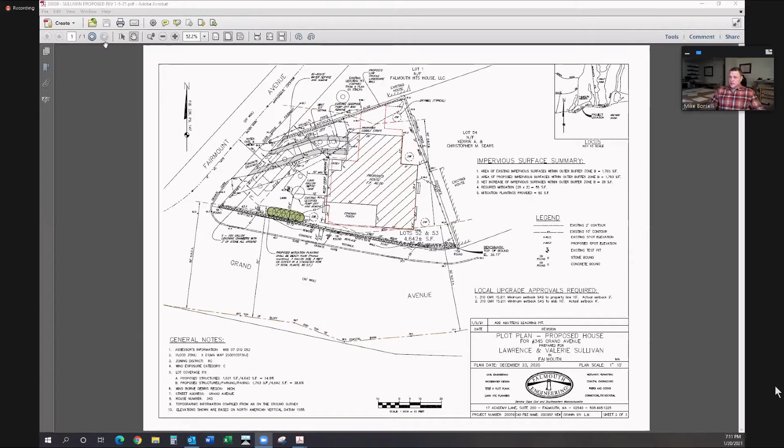The lot itself contains 4,642 square feet. I think you've seen houses bigger than that on some applications. And the existing house is shown on this site plan, outlined in red for reference. There's actually a bump out here that won't be reconstructed.

The house is in a state of disrepair. Significant maintenance is necessary, not up to code. So the owner decided it was best to raze and reconstruct. He's done his best to basically keep it in effectively the same footprint. There aren't really a lot of options on where you could put it.

There's two cesspools on the property, shown as dashed circles, that are substandard and slated for pumping and removal. There's a new septic system proposed on the lot, and it's virtually impossible to meet setback requirements from the road layout or the existing building. So we applied to and already received approval from the Board of Health for setback variances.

We did an impervious surface study, and that's in your package. With the calculations that we performed, there's a requirement for 56 square feet of mitigation planting. We obviously don't have the ability to put it along the top of the coastal bank because the road is there, so we showed it on the lot in this location in green.

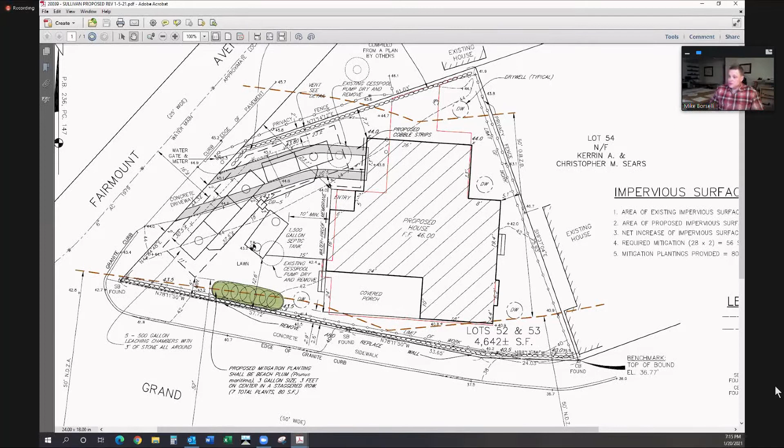Excellent, thank you Mike. Jen? Mr. Chairman, I think the only question we have is when did that deck area go in. Mike, if you want to look into that, when that small deck area in the back went in. In the aerials, it doesn't look like it's there in '18, it shows up in '19, or maybe '19 and '20. You might just have to look at that, or we might just have to talk about it.

Sure, if we do have you ground truth that, for when that decking went out there, it shouldn't be a long continuance. That's an easy thing. And if anything, it might offset your AC, and it might actually eliminate the need for your, what did you say, bayberry or beach plum. Beach plum, yep. So you may want to look into that.

The only other question we had, besides the stuff we talked about yesterday, was the wall, the little wall along that. Is it just kind of like a block wall, kind of tidy it up? It looks like poured concrete. Yes, parts of it meander out off the property into the road layout. I believe at its tallest point it's 2 feet. It's more of a tall curb than a wall, or a landscape feature.

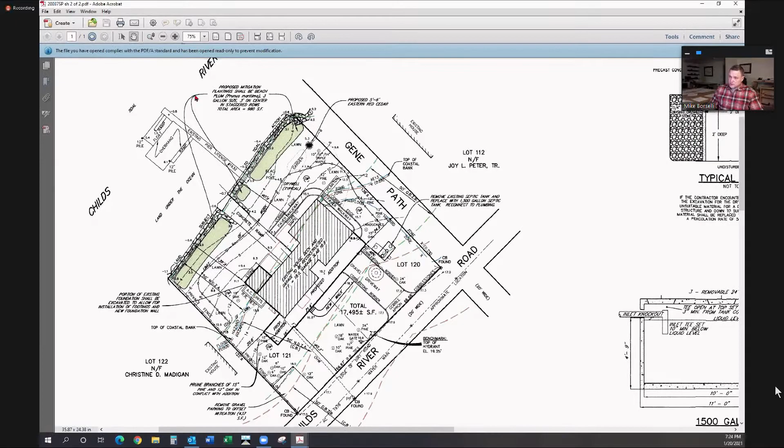The staff comments were reviewed, and there was a specific comment about a tree located right here, this 15-inch diameter tree, which we had described as to be pruned. When this addition is actually laid out by a tape measure and you really look at it closely, and the staff concurs with this, that tree would really, there's not a high likelihood it would survive. In fact, the canopy would be very close to the addition.

So the reality is it would be better to remove it instead of attempting to prune it, and if we removed it, we would replace it with another tree. But in talking to my client, we made a decision collectively, mainly with my advice, that this addition is not absolutely necessary. The applicant has made a decision not to construct this proposed addition. Therefore, the house will be squared off here, and this 16-foot by 12.5 projection will be eliminated. It'll eliminate any need for any pruning or any changes to the tree, because the face of the existing house will remain the face of the house after it's reconstructed.

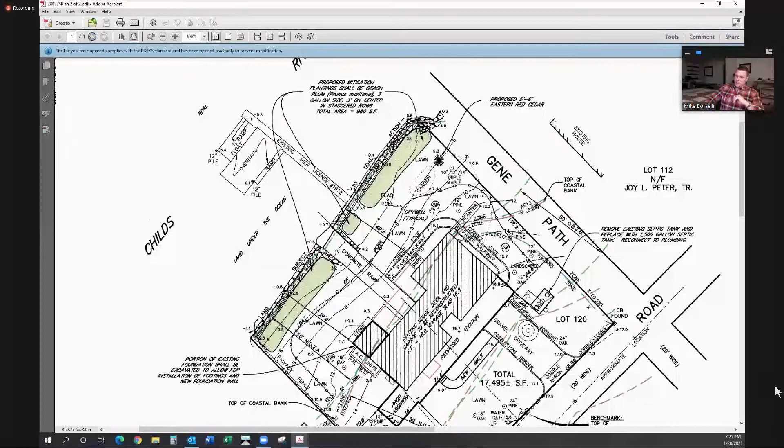There's another reason other than the tree that's important to the applicant, and that is when we staked out the required mitigation for these additions, he didn't realize how much mitigation he would need. His family and extended family and young grandchildren use this area. It's like the only flat area of the yard available on the water side of the house, so he was concerned about the need for putting the mitigation there. So if we eliminate this addition, there's another more self-serving benefit, if that's the right word, there's a reduction in the amount of mitigation.

So I would submit a revised plan that shows a portion of this mitigation eliminated from the application, to offset the reduction in the proposed impervious surfaces. So hopefully that was clear. I don't know if it was a mouthful, but if you have any questions, I'm happy to answer them.

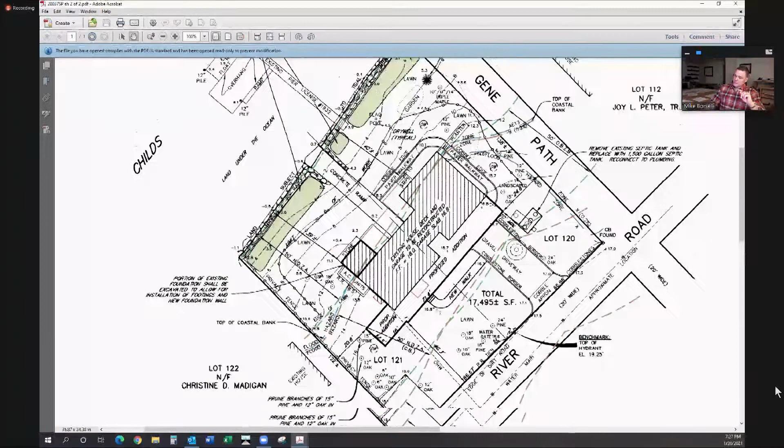The only other activities on the site include elimination of this pavement, this remote parking area. And there's an existing septic tank that's less than 10 feet from this addition, so there's a note on the plan to remove it and install a new 1,500 gallon septic tank that meets the 10-foot setback. The system passed an inspection, so that's the only upgrade to the septic system proposed. There's no plans to increase bedrooms; the number of bedrooms will remain the same. Otherwise, we would be proposing a septic upgrade as well.

I think there was one other question about a fence, and I'm not sure I understand the question. There may be a small wire fence. I think maybe there's a reference to a wire fence here, but I don't know the basis for the question or what's behind the question.

I believe there's about a 3 or 4 foot tall wrought iron fence along the wall. I believe so, but I'll have to check with my client. I believe, because of the grandchildren, it was like a safety thing, and there was no intention to remove it. But I can double check with him because of the safety concerns with this wall.

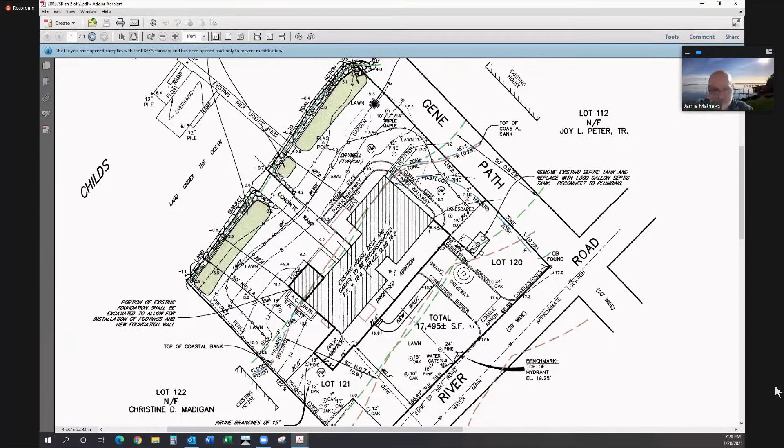Yes, Mr. Chairman, Pat's right, Mike. There's some little wrought iron fence right along the top of that revetment, because it's just lawn right down to the revetment. So it probably is a safety thing. We just wanted to know, once they put the plants there, are they going to be removing that? Because it is kind of an impediment to wildlife.

So you'll be needing a continuance, so you can check with your client, because you're going to be revising the plan. So I'm assuming you're going to want the third on this one too, correct? I would request the third. Okay, unless there's some chance that I can just submit a revised plan and you could close the hearing.

I'd like to see where you're going to put the mitigation, because I don't want to get into a situation, Mike, where all of a sudden the mitigation's like elongated along the property boundaries. Not that you would ever do that, but I just think that, since you're revising a significant portion of that mitigation, the board should be able to see what they're approving.

The only other thing is, after Alyssa and I had you on the phone yesterday, Mike, we were taking another look at the pictures she took, and that 12-inch pine near the planter you have over there. This, oh yeah, I see it. And the 12-inch oak over by the 15-inch pine I originally was concerned about.

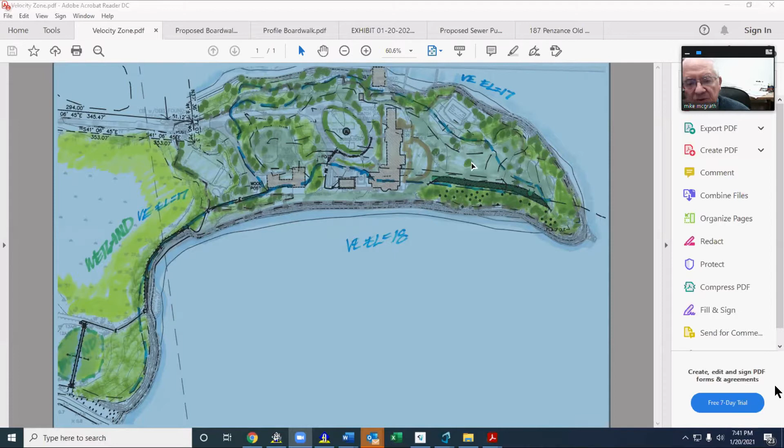There is the next thing we're doing, I should show you. What we're going to do is show that there's going to be a bathroom installed in this end of this structure. This is a stone structure. It's connected to this by a stone wall, and there's a framework overhead. When we put this bathroom in, we're going to put in a proposed connection to the existing sewer.

The sewer was installed a long time ago, over 20 years, but the capacity of this septic system is for 11 bedrooms. There's been changes in the interior of this house, and now there's only 5 actual bedrooms.

But in any case, this is for people that might be working on site. They can now have access to a bathroom without driving offsite or entering one of the private residences. And with the privacy of the new owner being paramount, plus the risk of COVID, he's decided it would be better to put this bathroom in.

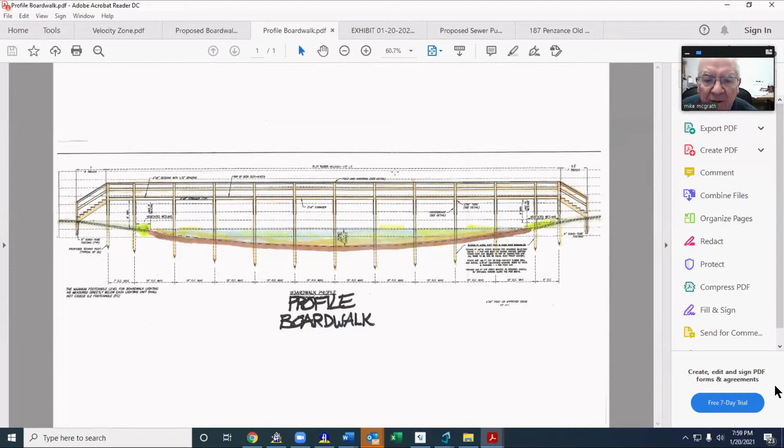I have purposely chosen this to be designed in accordance with the coastal zone management standards. If I were to elevate this above the velocity zone, like could be implied, it would be much, much higher. And I didn't think that was either appropriate for the landform nor appropriate for the neighborhood.

So when I look at this project, yes, it's got some interesting aspects, but I know from what I've seen and what I've read about the reports of this technique, that this technique will restore this pond. It may take 2 years, but I believe that's an appropriate activity, and I think it's a worthwhile endeavor. And I look at all of the things that are being done on this site, and I think it's absolutely an approvable project.

Anyways, I'd be happy to answer any questions that the commission might have.

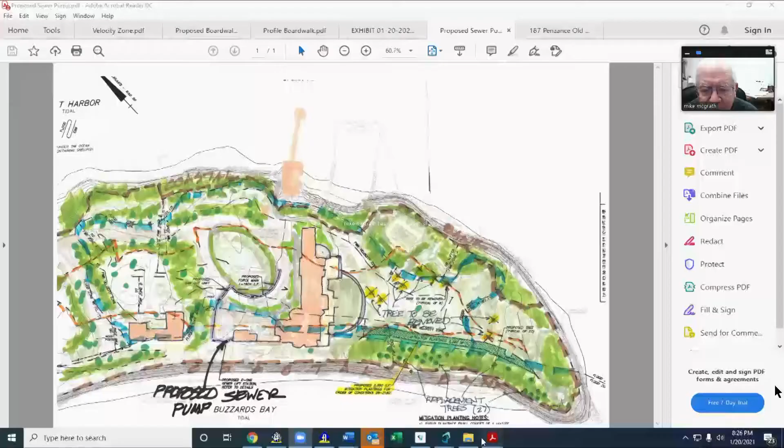Could I share my screen again? Yes, sir. Sorry, I'm a little bit slow. What I think you're talking about is that we staked out this proposed path, but we also did a survey of it a long time ago. So it may well be that what you saw was the remnants of when they did the original survey, but that was over a decade ago, over 10 years ago. So the proposed path here, we were putting it up against the riprap, but there's no question there's been erosion in this area. So have I answered your question?

Almost, you have the right area. I was wondering, the stakes said the pathway in that area that you ran the mouse over, but would it expand toward the wetland areas or expand toward the ocean? What I had thought was going to happen was we were going to build the path basically centered on the stakes, but we can adjust it on the ground if you want us to. Well, if you centered it on the stakes, that would be a build out from the center line, both toward the ocean and the freshwater wetlands. Is that your intent? Yes, it was. Okay, no further questions.

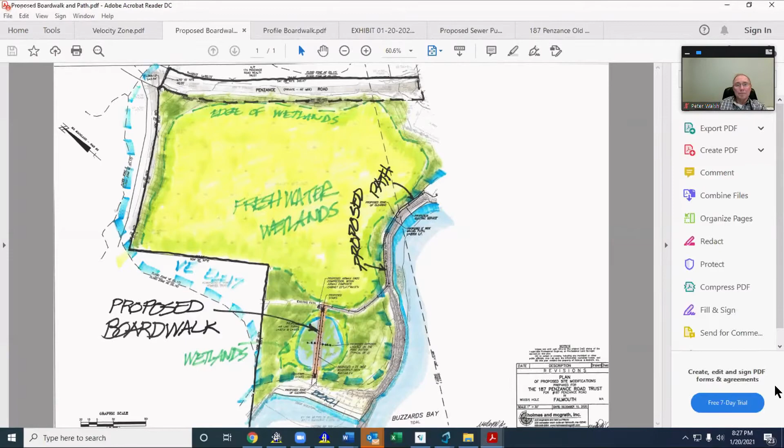All right, Mike, if you would stop sharing, please. Trying to. Oh, okay, thank you. All right, Steve. No questions, sorry.

All right, Courtney. So it appears that the major sticky wicket on this project is this boardwalk. The only comment I have is I would concur with Lori and with Jen that you guys should explore what alternatives you have for some kind of a meandering path that avoids taking out major trees and so on. I know you're pretty ingenious, Mike, when you put your mind to it. So hopefully you can come back to us with a plan that kind of meets those concerns. I mean, if this wasn't a velocity zone issue, I probably wouldn't have as much of a heart attack about it, but it is in a velocity zone, and there's enough precedent that has been cited by people in the audience as well that we would be going against if we were to approve a boardwalk. So I would look into the alternatives.

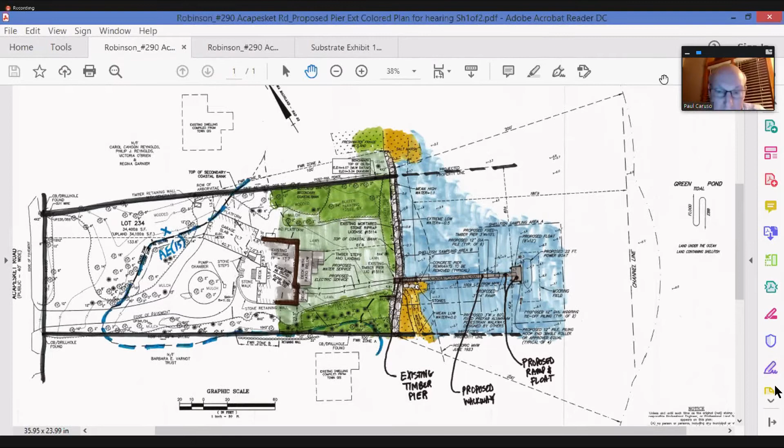Good, hopefully you've all received my report. For the record, Paul Caruso, Cape Coastal Resources. I'm working as a shellfish consultant for the project. I have a prior history with Mass Division of Marine Fisheries for 30 years as a senior biologist.

Hopefully you've all gotten the report and been able to read it. I don't want to go too deep into it unless you need more information because it'll take up too much time. But a survey was performed at the site August 20th and 21st, early in the morning, because the good tides were early in the morning. We had minus tides, which makes things a lot easier working in shallow water. As pointed out in the previous exhibit, the seaward margin here of this property is bordered by a continuous seawall.

We have a small fringing salt marsh, and north of the salt marsh, the subtidal land runs right up to the riprap. There's no beach per se. Sediment-wise, you have a nice sandy mixed sand flat that runs offshore to about -3 feet. At that point, we have a relatively steep drop off. It goes off pretty rapidly to an all-mud bottom.

The survey, as per the regulations, was divided into two areas. Area B is the shoreward area, and Area A is the area outside of that. That shoreward area extends out to 60 feet seaward from the mean high water line.

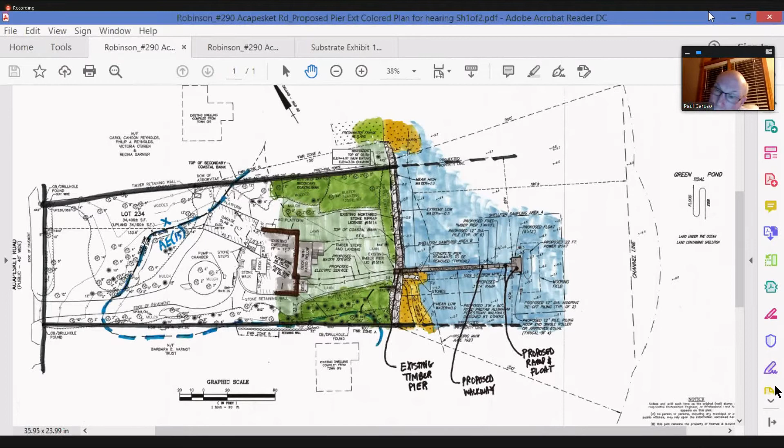Let's pull up the exhibit we were talking about of the sediment type—Jeff did this. It's pretty nice. If you look at the sample points with the dotted circles around them, that's all the muddy habitat. You can see there's a bit of a diagonal to the bottom where it's all mud seaward, and only a few muddy spots shoreward of that line. That line is right at the break between the two areas.

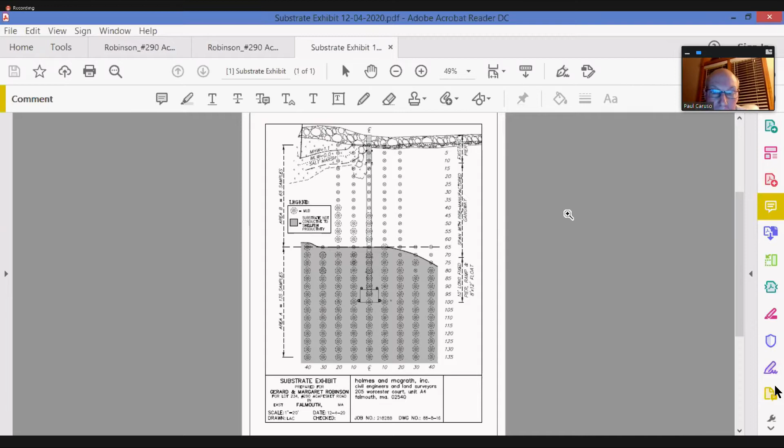So pretty much it. Anybody has any questions, I'll be more than happy to answer them. Thank you, sir. Mr. Wood, did you have something to add?

Yes, Mr. Chairman. Glenn Wood, Rubin and Rudman, good evening. Just a brief couple comments, in particular relative to the case law that we cited and in reviewing the staff report.

I was involved personally in both of the two cases that we cite in our letter to the Conservation Commission: the Olson project, which is on the other side of this pond, but south of the bridge, and then the Adams dock project, which is about 10 plus or minus properties to the north.

Interestingly, what we've found over the years—and I frankly haven't done a dock project in Falmouth in some number of years, the last recession really shut that down to some extent—is that what we found in this survey through Paul's work is very similar to other projects I've been involved in the past, whether that was with Holmes and McGrath or Mike Briselli and LEC, dating myself here.

But from a dock siting perspective, the west side of this pond is very appropriate for docks, because what we find is we do have some viable shellfish habitat due to substrate in the inner areas, as Paul's survey shows.

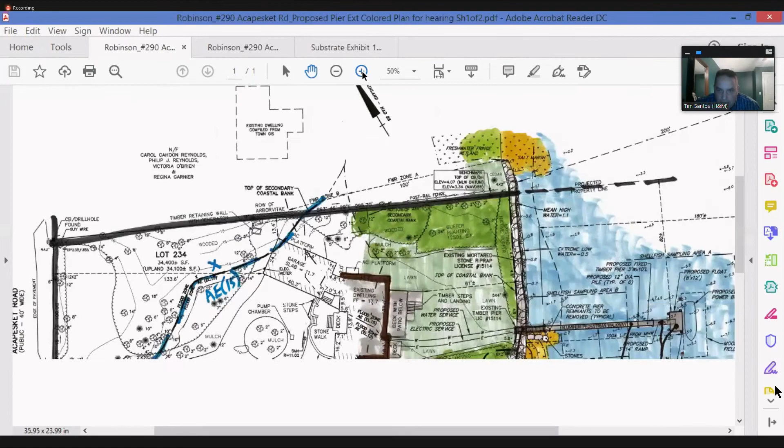All right, Pat? So maybe you can clarify something for me. I've looked at various drawings, and it's unclear to me if you're measuring the length of the dock under our regulations from the mean high water, or from the salt marsh. Can you clarify? Yeah, if you don't mind, I'll pull it back up. Sure, it's from the mean high water. Just give me a second, please. It's measured from the mean high water, which is actually slightly higher up on the riprap than the salt marsh. So if you've been to the site and looked under the existing wooden pier, obviously the salt marsh is lower than where the mean high water comes on the pier. But it's measured from the mean high water mark on the pier out to the terminus end, so the mean high water is actually more restrictive than the landward edge of the salt marsh. Does that make sense?

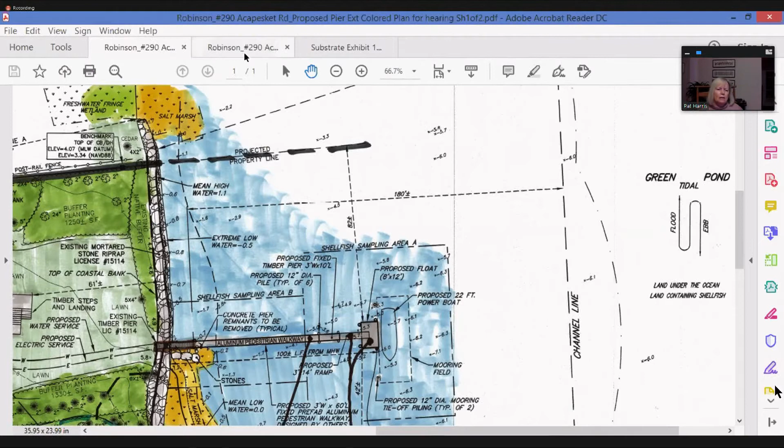Right. Yeah, and when I was out there, I saw some algae on some of the rocks in the revetment and was kind of guessing where the mean high water might be. But what I'm struck by is I look at your cross section and it looks as if the dock measured from the mean high water out to the float exceeds 100 feet. You note on this cross section 107 feet. Well, the 107 is measured from the landward edge of the existing wooden dock. Okay, and how many feet do you take off to get to the mean high water? I believe that would be 7 feet.

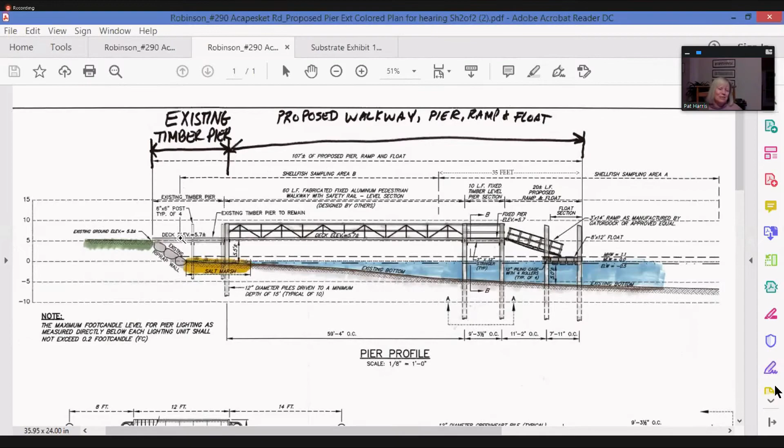Good answer. Okay, I have no other questions. And I apologize, I wasn't trying to say that in a rude way, if it came off that way, because I just realized it might be helpful.

It looks like this. Are you planning to continue this? I think we probably would continue it if staff and the commission members are looking for the mitigation type plan, and I believe Jen's looking for that, so I'm assuming the board members would be looking for that. When you submit the amended plans, could you also address my concern? Yes. Thank you.

Peter, Pat addressed my concern, no further comments. Excellent. Steve? Thank you, I had a question about the length and that was answered. Thank you.

Courtney? Actually, my question is more for Jen. It seems to me over the time I've been on the commission, and it's now a long time, that we have seen projects similar to this in the past where the applicant has attempted to bridge a shellfish area to get far enough out to build his dock or have his dock. Is that, am I dreaming, or have we actually had that? And in those cases, if we did, how did we rule?

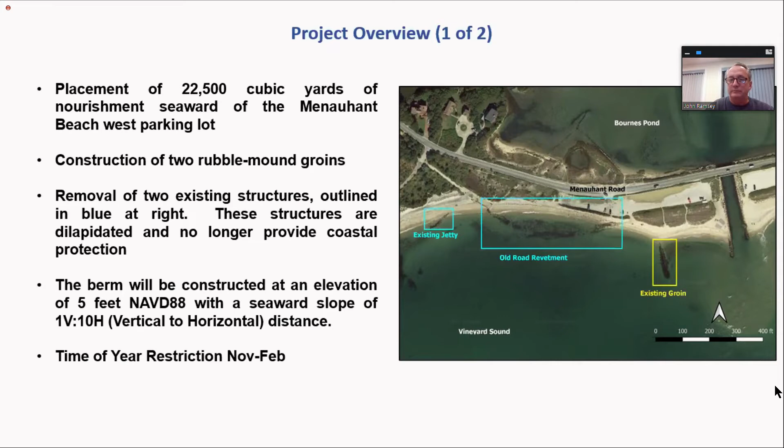One of the things we talked about last time was the removal of the existing building foundations. I'll talk about this in a minute, but one reason they're not shown very specifically on the plans is that this beach is eroding so quickly that more of the foundations keep becoming exposed. We specifically see that in the building foundation that's there—parts of it came up just this past year that weren't exposed last year. So we don't want to say too specifically what we'd like to do, but we want to make sure we're working with the Conservation Commission staff to ensure all of that is removed.

I know the DPW is committed to removing the bridge and all the structure associated with it, the old bridge, and getting as much of the foundation, if not all of it, and certainly everything exposed, out of there. There are a lot of wood piles and other accoutrements associated with that, and there may be some water lines we need to deal with. The Conservation Commission has dealt in the past with the asbestos-lined water line along the old roadway, and we anticipate running into this under the bridge. The town knows it's a hazardous waste issue that will be costly to remove, but they're committed to going forward with that process when we remove the bridge, removing all of that as well.

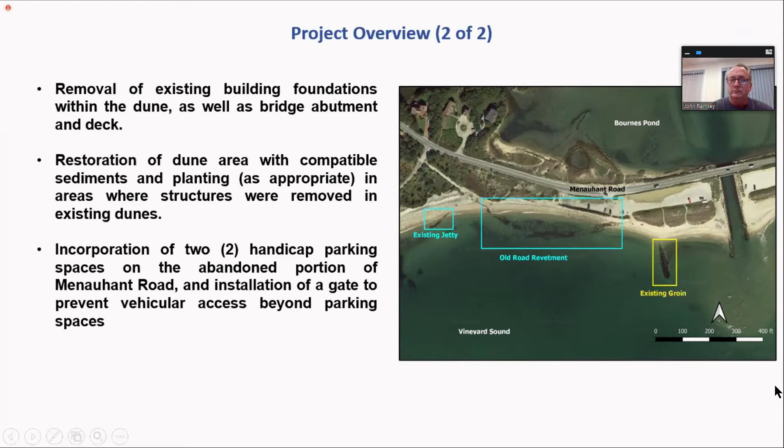This is the overall site plan you've seen before. The only difference here is these spaces. Now when you come down Foster Road, you'd actually come down old Menauhant Road, and the spaces would turn in this way. As Jim mentioned, there's an 8-foot area between them so it's ADA compatible. You also see that the rocks at the end of the road would be removed, and then this gate would be placed, allowing vehicles to back up and go forward back out onto Foster Road and out to the existing Menauhant Road. That should alleviate some of the concerns regarding people having to back out onto Foster Road.

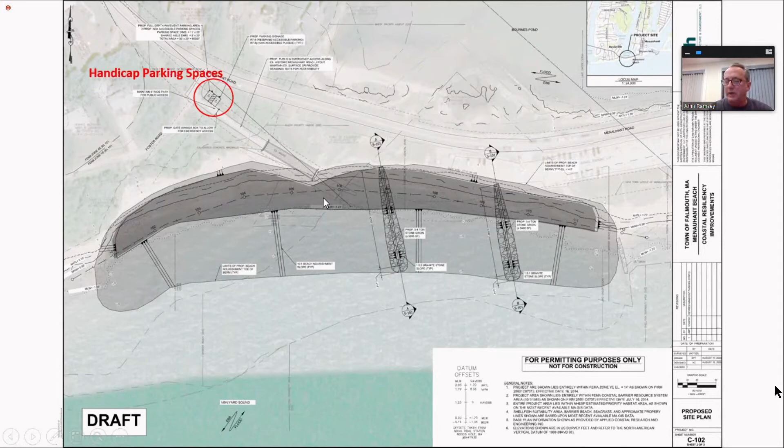Then the other issue that came up in comments from the commission was about making sure we include some beach profiles.

Sorry, we'll talk about potential planting first. I moved these slides around as we were going.

One of the questions that came up was about planting the actual beach berm. This came up regarding potential planting in the beach berm, where there's going to be nourishment to the east of the inlet associated with the bridge project. In a similar case, we reached out - if you have questions about this, it was actually Trey who talked to Amy Hoenig at Natural Heritage.

Basically, because this is plover habitat, they don't want to see planting on the beach berm itself. They wanted to leave that barren for the plovers. On the other hand, they know we're taking these foundations out, and they're actually pretty excited about that. They would certainly allow, when these foundations are taken out, restoration of the dune area, which could be replanted, and we'd want a more contiguous dune as shore protection as well.

So that's a kind of win-win for everybody. But I think Natural Heritage looks at this as not wanting any adverse impacts to the bird habitat, so they're basically suggesting, or will require, that we don't plant or put sand fencing up on the beach berm itself.

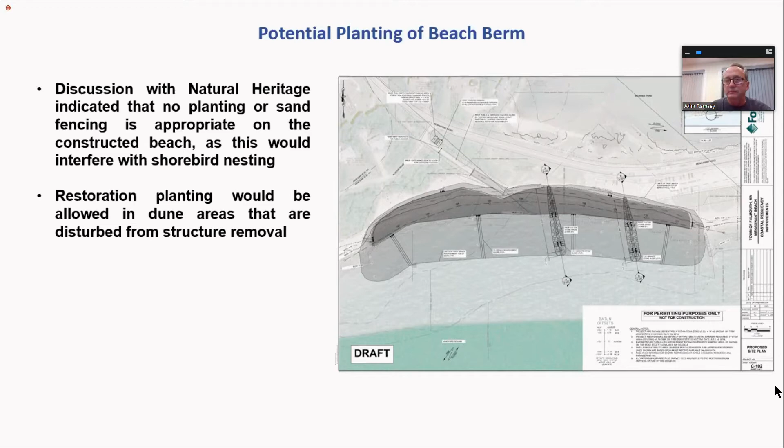One of the questions that came up was about beach profiles, so I wanted to point everybody to our sheet, the S101 sheet. While the groin profiles are on here - that's the flat profile that goes out - the beach profiles are also on here. The beach elevation, the berm part, is about 1 foot above the groin.

Then it slopes off at a 1-on-10 slope all the way basically to the tip of the groin, meeting at the tip of the groin down where it intersects with the existing bottom. That same beach profile exists all along the shoreline, so you basically see the same beach width, beach berm width, at an elevation of 5, then sloping down to the existing seafloor.

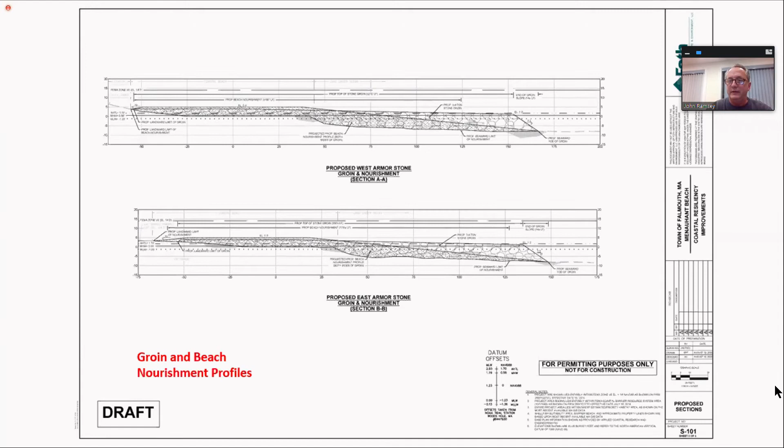Obviously for folks that have been out there a lot, the offshore area is quite shallow.

As far as upland structure removal goes, the town's committed to this. These are actually pictures just from this past week, and I was kind of amazed at how much more of the foundation, specifically the house foundation on top there, is exposed. There appears to be a secondary foundation that's not yet exposed behind it as well. The town is committed to taking all of this out.

There are now some old water lines, rusted, that are in there, and obviously wood piles. So what we're really looking to do is break this up with a hammer, remove the material, and then pull the piles. I expect some of the piles may break, but we should be able to either pull them out or use some water to work them around and remove them.

These typical bridge abutments typically also have wood piles. We don't have the plans for this bridge, at least not the foundation plans, but we anticipate when we start breaking that concrete up and pulling it out, we're going to run into a similar situation. Keep in mind this foundation, especially the bridge foundation, is going to be buried in nourishment if we didn't remove it.

But we are going to remove as much as we possibly can get at, and certainly all the concrete's going to go. I just don't know if we'll be able to get down to all the piles, but any pile we can get at during the excavation for pulling out that concrete will be removed as well. The bridge deck will be gone, along with the water line, and the other abutment further to the west will also be removed.

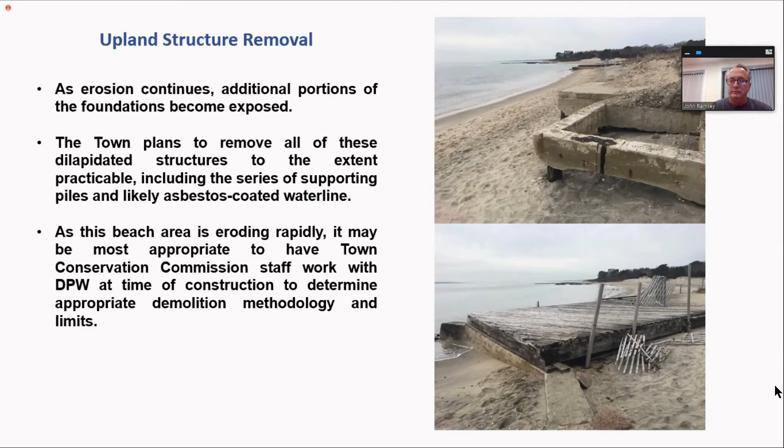So one of the other issues that came up in our October meeting and has been discussed a bit was the concept of monitoring.

And those will be monitored, as I said, every year. Reports will be submitted to the Conservation Commission in the first year, third year, and fifth year, unless we see major changes or the Conservation Commission would like to see an annual report.

As we talked about the methodology, it's pretty straightforward. This is something we do all the time. We usually use RTK, so we set a back station and a front station to get in line, and then we basically take a measurement just about every 5 feet going down the face of the beach. For the offshore portion, the person doing the hydrographic portion of the survey would put it into their software to actually have the line and run it with similar equipment.

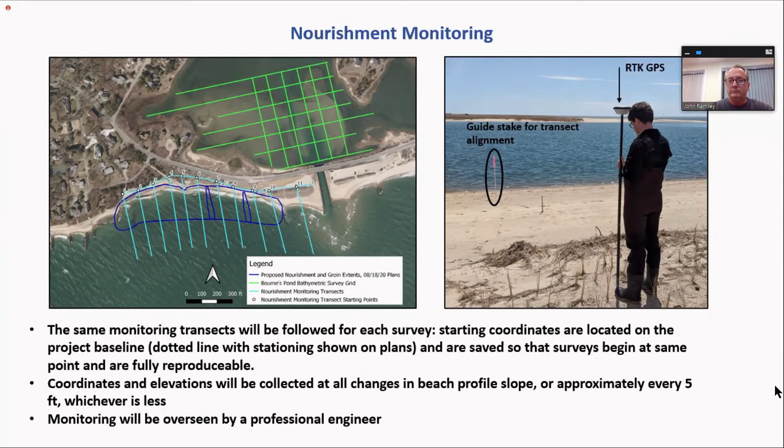The other aspect of this monitoring that was requested was to expand it to include the area inside Bourne's Pond. There has been some history with concerns over past nourishments that may have deposited material onto the shoal there. We want to make sure that doesn't happen again. We believe this project is designed to not encourage that, but to be on the safe side, we're looking to include that in the monitoring.

That's the type of thing we would be looking to create to give the commission not only the data, but the visualization as to what's happening. Again, all this monitoring, we're looking at doing it for a 5-year period, and obviously if some massive changes occur, the commission can extend that monitoring if they feel the need. We anticipate that this nourishment should perform the way we expect, and that we shouldn't see an increase in shoaling within Bourne's Pond.

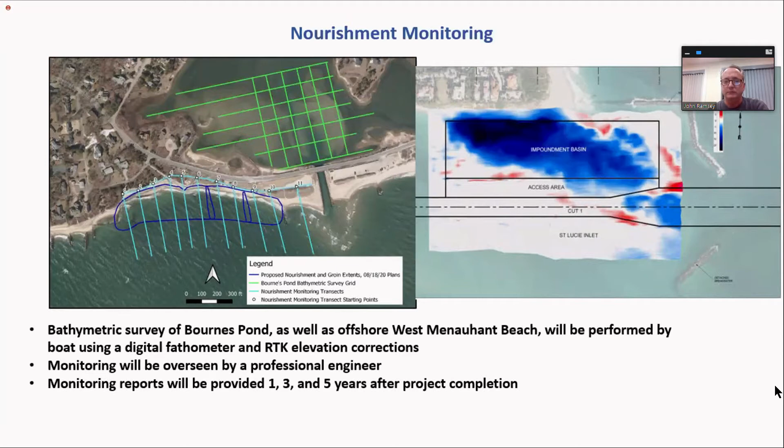Some questions were asked about the grain size. This is something we presented last time and expanded on a little bit, but this was something that was in our environmental notification form. We are committed to making sure we're bringing in compatible sediment.

One of the places we want to get sediment from is actually the widening of the inlet project. But if that sediment does not test as coarse or coarser than the existing material, we will not use it, and that material would then be placed on the beach to the east. But if it does meet the standards, then we would probably get up to one-third of the volume for the project from that inlet widening.

The remaining material, whatever it ends up being, would need to be trucked in. That would be because by the time that's trucked in, the bridge will probably have been removed, as this is part of the ongoing bridge reconstruction project. So all that material would come in through roads from the west side of the project.

So we would be checking grain size every 1,000 cubic yards. It's pretty standard for us to do that. We have not determined the specific source, but we have determined what the gradation will need to be. We would be looking for somebody to match that gradation, and part of those requirements would be less than basically 5% fines. So this is not going to create a turbidity issue, and it will be compatible with what exists at the beach now.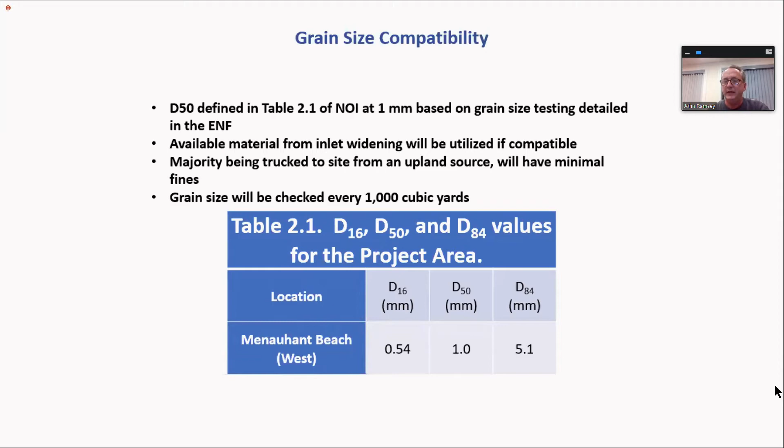A lot was discussed last time about construction sequence, and I just wanted to reiterate what we put in our memo to you on December 9th. Keep in mind that this is intended to be linked with the inlet widening project occurring to the east at the same time, because the road's going to be closed during that, basically a 2-year time period.

So once the road's closed, we'd be looking at starting with removing the existing bridge remnants, disposing of the wooden superstructure, breaking up the abutments, and pulling the existing timber piles. When I say to the extent practicable, there may come a situation where we'd cause more damage than good, but we'll do everything we can to get all of the structure out, and we'll certainly get all of the concrete of the abutments out. It's just a question of whether we can reach the piles.

For the building foundations, we'll be breaking up that concrete and removing it. It appears we should be able to remove all of those piles and anything associated with those structures as well. Then we'd be stockpiling the sand from digging the inlet over on the Menauhant West Beach parking area.

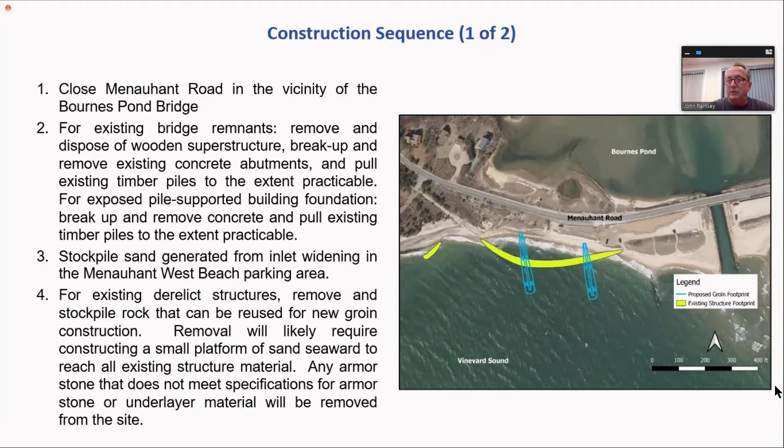For the existing derelict structures, the ones highlighted in yellow, we will be removing what we can reach from the beach, and then using some beach nourishment material to build out to the structure so we can reach it and pull it. That will be pulled out as we're basically generating some of the beach nourishment as we're moving. Number 4 and probably number 5 here will be done concurrently, which is building the groins at the same time we're removing some of those derelict structures.

Depending on where the nourishment comes from, we'll also be stockpiling other nourishment material. The eastern groin will be constructed first, and then we'll be building the nourishment basically from east to west. Then we'll construct the western groin. While item 8 looks separate, we'll be nourishing as we go — once the eastern groin's constructed, we'll start placing nourishment east of there as well as starting west of there too.

After that nourishment's in place, we'll restore all the dune areas to basically the pre-construction topography, and we'll plant beach grass for any of those disturbed areas. Again, it's very difficult for us to say exactly how much area is going to be disturbed and whether it's in a dune or not, depending on how the erosion occurs over the next year or so.

This unvegetated footpath we're talking about is also going to be that emergency access. We're going to maintain at least a vehicle width for that walking path along the old Menauhant Road. Then we'll clear off the pavement of that historic portion of Menauhant Road immediately east of Foster Road, and install those two demarcated handicap parking spaces and the gate that Jim talked about.

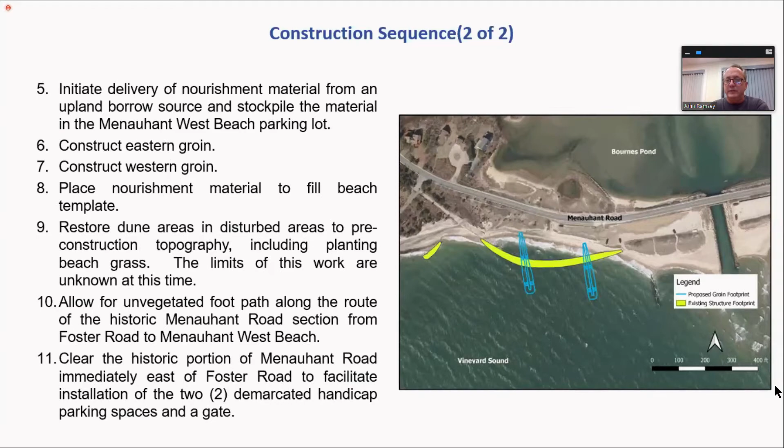So with that, I wanted to make that as quick as possible. I'm sure you guys have plenty of questions, so I thought I'd open it up that way — it'd probably be easier to discuss. Thank you.

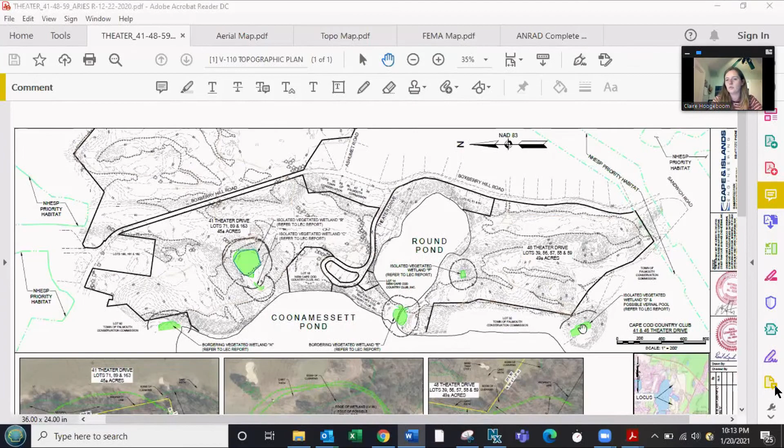I'm going to zoom into a couple of these wetlands to discuss revisions. This A series that I first started with, Mark had no issues with the wetland line. We didn't change or revise anything there.

I'll go to this central area that holds the potential vernal pool. We have the B series wetland outlined in green, and the potential vernal pool's mean high water line outlined in dashed blue. Mark had a couple of extra flags he wanted to add to encompass all of the mean high water, which was perfectly fine. I agreed with him on all of his revisions there, so we added a few flags to expand that.

He had no revisions to our C series here, which you can see in this lighter part of the aerial showing where the golf fairway is. So we had no revisions to that C series.

Over here, I want to briefly touch on this bordering vegetated wetland associated with a water feature that connects Round Pond and Coonamessett Pond. This feature is pretty much entirely inundated, so the bordering vegetated wetland is a relatively fringing wetland. The only revisions I made in the field with Mark are to flag E22.

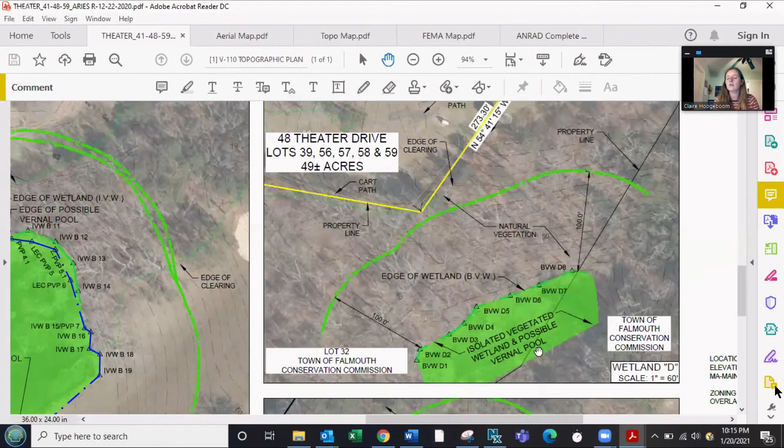Lastly, let's see, we have this small isolated wetland in the depression, no changes made in the field. So lastly, we have this offsite isolated vegetated wetland that's on the conservation land. We initially had labeled it as bordering vegetated wetland, and Mark and I looked at it in the field and we both confirmed that it is in fact isolated and as such would function as a potential vernal pool because it does hold a sufficient amount of standing water.

So we revised the plans to show that as isolated vegetated wetland and a potential vernal pool with the mean high water essentially coincident with the wetland flags for this particular wetland. Considering that and our successful review with Mark and agreeing on the flags together, we respectfully request the issuance of an order of resource area delineation and are happy to take any questions the commission has.

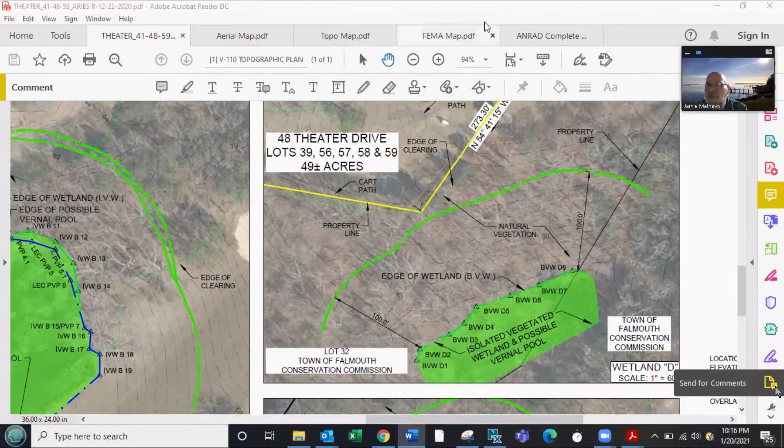All right, thank you Claire for sharing. I can stop my screen. Raul, do you have anything to add? Not at this moment, thanks. All right, Mr. Turner?

Jen? No questions, Mark is very thorough, Claire, as I'm sure you found out. So he's really good. Thank you for working with him, and thank you for going back out and addressing his concerns.

I do just have one question for Mr. Turner: why aren't we delineating Round Pond and Coonamessett Pond? Out of curiosity, I'm sure Mark has asked this question too. We had no expectation or plans, and still have no expectation or plans to be anywhere near them or touch anything within 100 feet of them.

Okay, so the conceptual plans submitted to the planning board are holding those 100-foot buffers to both Round Pond and Coonamessett. Yes ma'am, at the minimum. It's possible to be moderately larger location to location, but an absolute minimum of a no-touch. My general rule of thumb is if I don't need to ask for it, I don't have a very good argument to ask for it. In this case we've got enough golf course to work on, so there's no need to make the request to go into the buffer. Yeah, 100+ acres of golf course, yes.

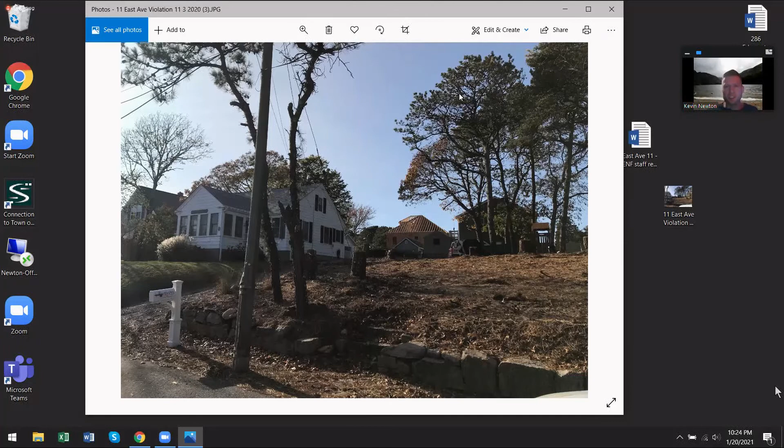Everyone good? Yes. Okay, Kevin, can you stop sharing please? Sorry, Mr. Chairman, I think Kevin froze. Good there. Do you want me to keep the screen up? No, please take it down. Thank you. Yep, all right.

Mr. Chairman, I'm going to jump in right now. So Kevin, thank you for that.

So since the initial letter, the Dohertys have been working with the staff, so thank you. I believe, Mrs. Doherty or Mr. Doherty, you can correct me if I'm wrong, or Kevin, that you've already engaged with a surveyor, because I think it's important for this, since the wetland in question is across the street. We really do need to find where those boundaries are so that we can appropriately guide them on how to mitigate. So I know that you've contracted with a surveyor and reached out to a restoration company. Is that correct?

Yes, if you want me to share my screen with my quick notes. I know it's been a long evening for everyone, but it's not much, if that is helpful. No, it's your time to address the board, so please. Sure.

Uh-oh, hold on. For some reason it's not allowing me to share my screen because of system preferences. Is it saying it won't allow you? Yeah, it's kicked me over to security and privacy, but it's not allowing me to click on it. Wait, hold on, let me try.